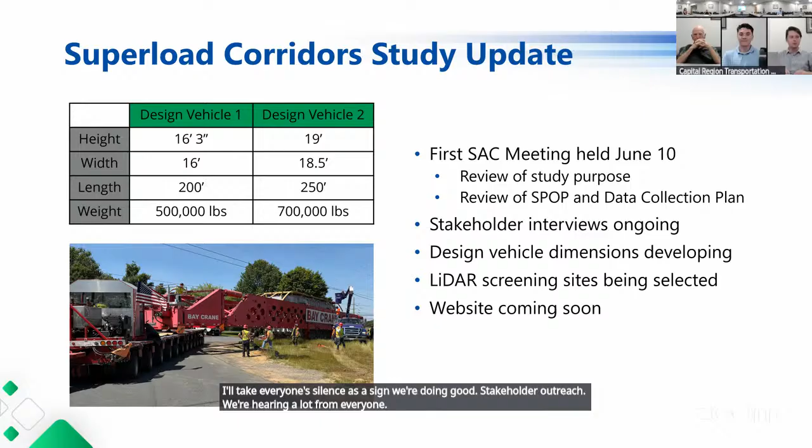So does anyone have any questions about the current status of the superloads, or anything they'd like to share that we haven't heard yet? I'll take everyone's silence as a sign we're doing good stakeholder outreach. We're hearing a lot from everyone, and really appreciate everyone's participation in this study.

So next I'll turn it over to Adam for an update on the Capital District Clean Communities Program.

Thanks, Ethan. So I'll keep this pretty brief. On June 25th of this year, we had our first stakeholder meeting, and it had just around 15 attendees. That was a pretty great start given that it was the first official meeting we had since funding returned in April of this year.

At that meeting, we had Jacob Beeman from National Grid speak about their fleet electrification programs and initiatives that they're able to assist municipalities and stakeholders with. It's mostly on the grid side, not necessarily the vehicle side, but they can do a lot of assistance and problem solving that could be useful when you're going about those projects. Definitely worth looking into if you're pursuing that type of transition.

Also, a resource I wanted to share with this group specifically is that the Advanced Vehicle Technology Group has an electric vehicles essentials online training, in case there are any fleets looking to scale up their workforce for hands-on technician-style training on how to handle, maintain, and work on EVs. It's a great resource if you're looking to do training for those folks. If you're interested, email me—there's my email. There's a discount code involved that we can work with through Clean Cities.

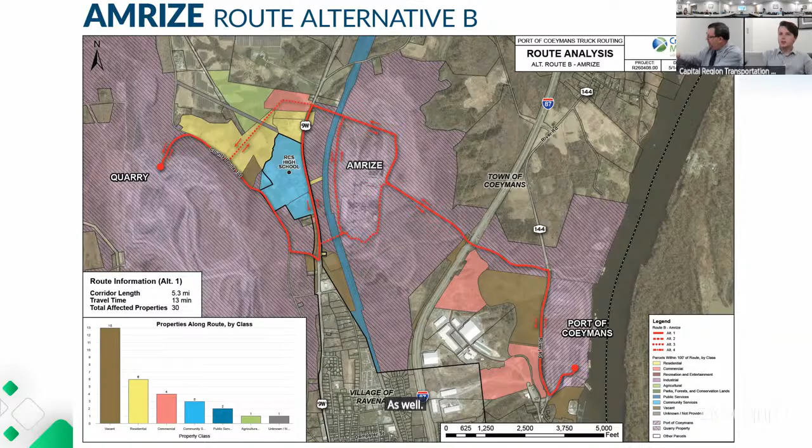So the last thing we have is just our typical updates on our regional planning studies. No big changes here from our May meeting. We have our Aiken Ave study and our Town of Stillwater study, which are both in the process of getting started. Both are out of the initial scoping phases, and those should be developing soon.

We also have our larger studies, our Albany County study looking at trails and sidewalks in different spots in the county, as well as a couple of other smaller tech assists getting started, and our larger initiatives that are still ongoing, including that superload plan we talked about. We've also just selected a consultant for our Capital Region Resilience Plan.

I'm sure we all felt the impacts of the rain the last couple weeks. I heard this was the most rain the region has gotten since one of the last hurricanes came through the area. I experienced a number of road closures as I was traveling throughout the region, and many warnings saying do not travel unless you're escaping floods.

So hopefully this study will identify improvements we can make throughout the region, both at specific sites and system-wide, to help mitigate the impact of these increasingly frequent extreme rain events. If anyone's interested in that, reach out to me, and I can connect you with Andrew Tracy, who's our staff member leading that resilience plan.

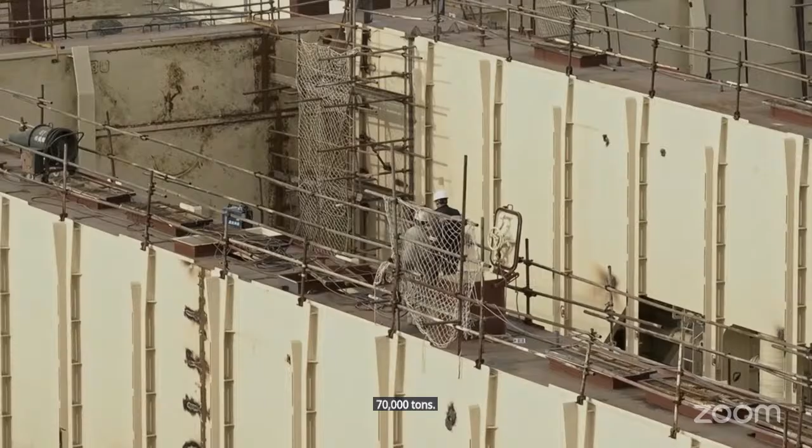70,000 tons. Intense vigilance and rigorous organization are essential at all levels for these behemoths to be completed in time. In one of the shipyard's many warehouses, workers are building a section of the ship called a block. A special system is used to coordinate the production of the 9 ships, similar to a giant Lego.

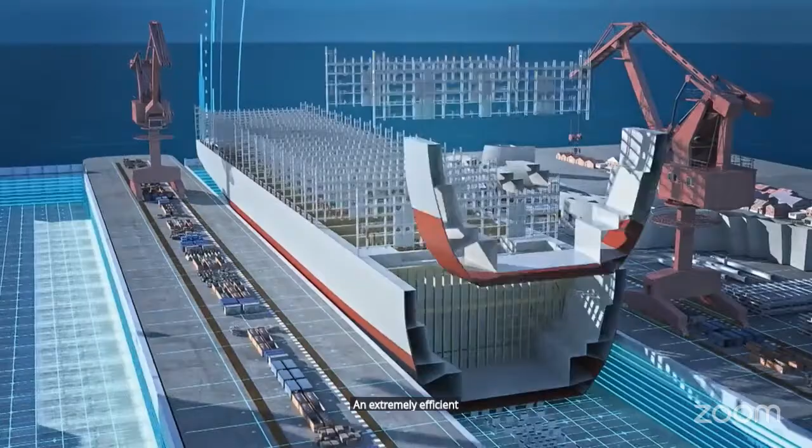The ships are assembled in the dry docks in huge basins. One by one, the blocks are delivered and welded together, an extremely efficient construction method. Each block has a precise function and specific place in the overall construction of the ship. To produce these giant vessels without wasting time, the construction plan was broken down into thousands of independent blocks, like an assembly line. And to save even more time, everything's already installed: piping, fittings, ready to be connected.

These huge parts are brought to the center of the shipyard near the dry docks, where they're mounted on the part of the ship already built. Like a skeleton, every single part of the ship becomes visible.

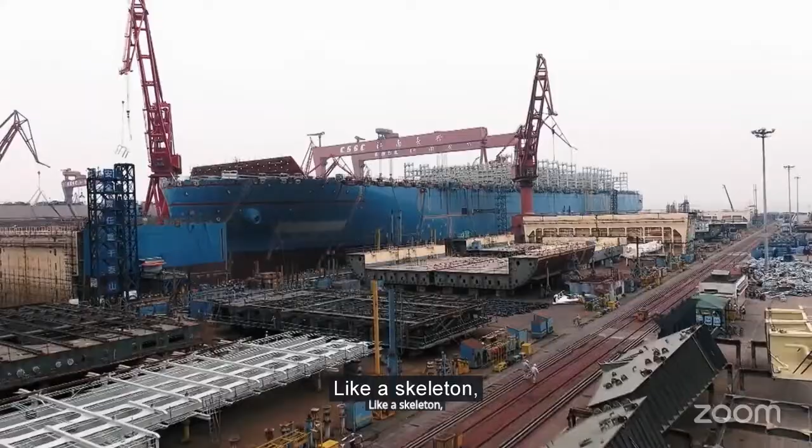These floating giants have a very thin but extremely strong outer wall. A complex puzzle with countless pieces.

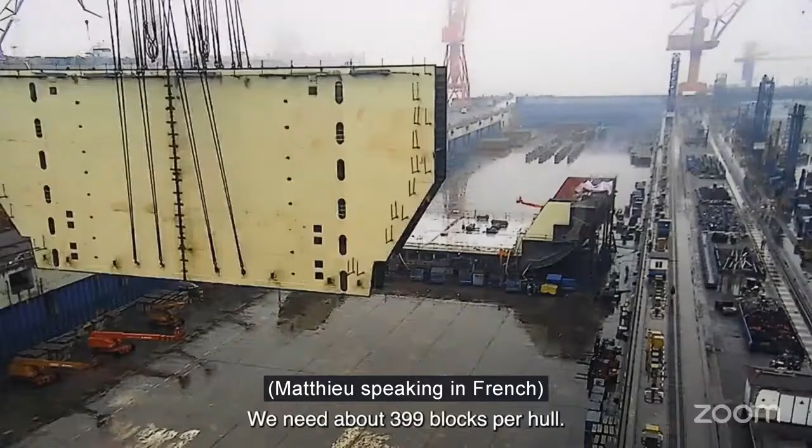All parts need to be assembled with surgical precision. Part of the tail, consisting of 5 blocks, slowly moves towards the basin like a spaceship from Star Wars.

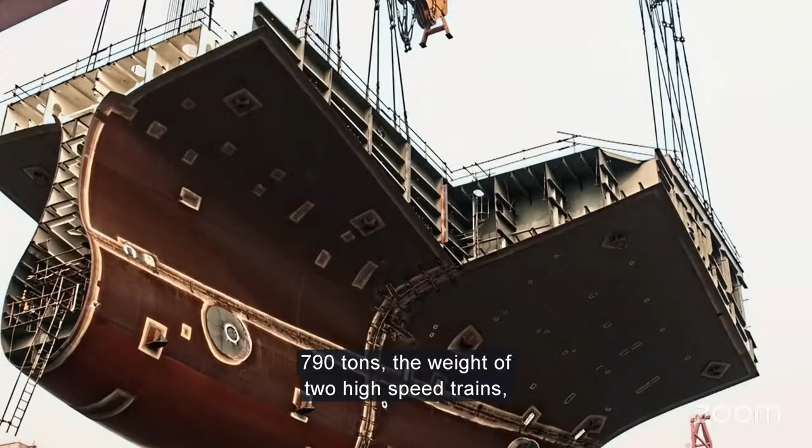790 tons, the weight of 2 high-speed trains, floats in the air. No problem for the massive port cranes, which can lift up to 600 tons, with 2 cranes working together. The assembly of the massive parts has to be perfect.

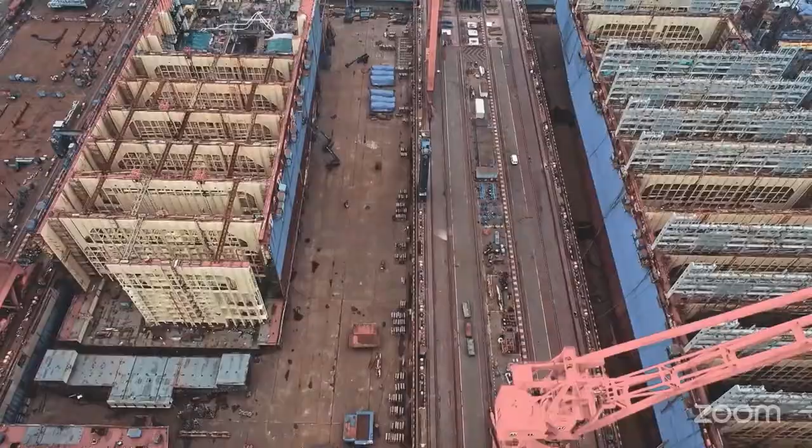But how's it possible to build the ship without blocking access to the bottom of the ship? How can individual parts be protected from getting damaged on the ground?

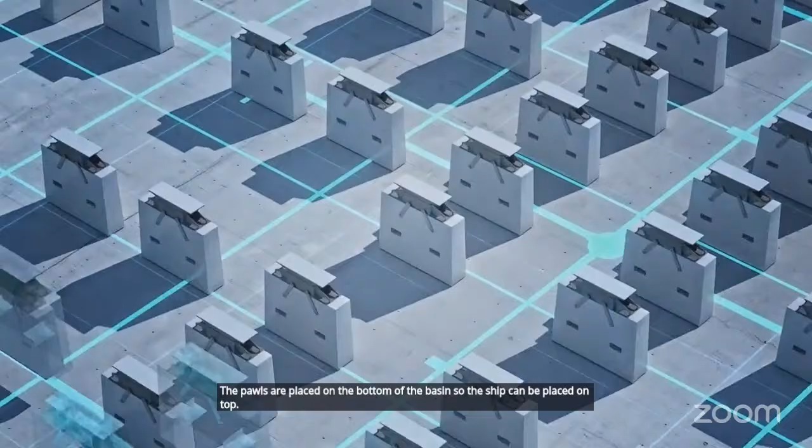The trick? Small, incredibly stable support beams, known in technical jargon as pawls. The pawls are placed on the bottom of the basin so the ship can be placed on top. A pawl consists of a concrete block with a metal structure attached on top. Each one can carry 200 tons without damaging the hull. Together, the pawls support the weight of the completed ship, nearly 70,000 tons.

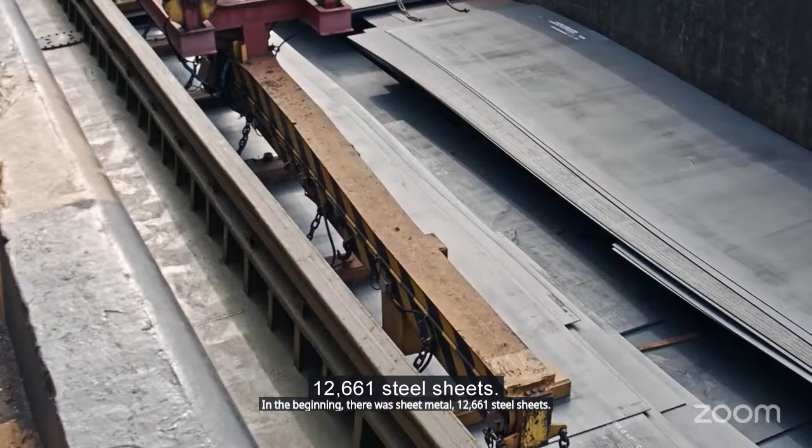Everything's ready for the next mega ship to be assembled. In the beginning, there was sheet metal: 12,661 steel sheets. They're the raw material for the structure of container ships.

Just like cells in the human body, they're delivered by sea, by the hundreds. The structure of the ship is made of these sheets, mainly steel, a material that can be used over and over again. The beauty of a ship is that it's 99.9% recyclable. When the ship's dismantled in 30 or 40 years, almost all the parts can be recycled.

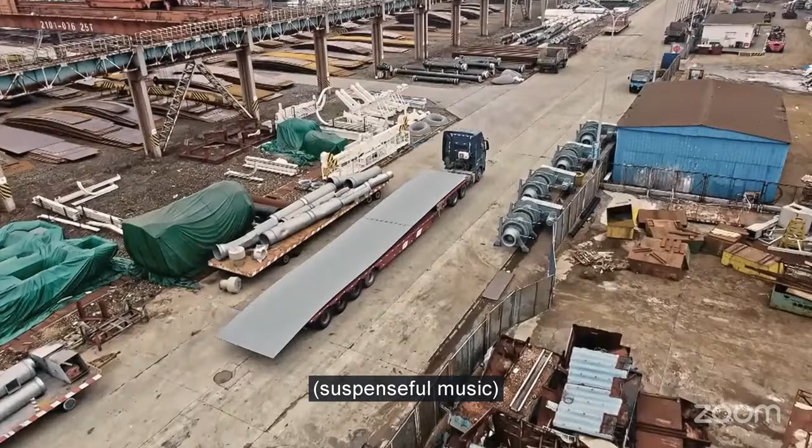This sheet metal field is located near the warehouse. Thousands of plates are waiting to be cut to size.

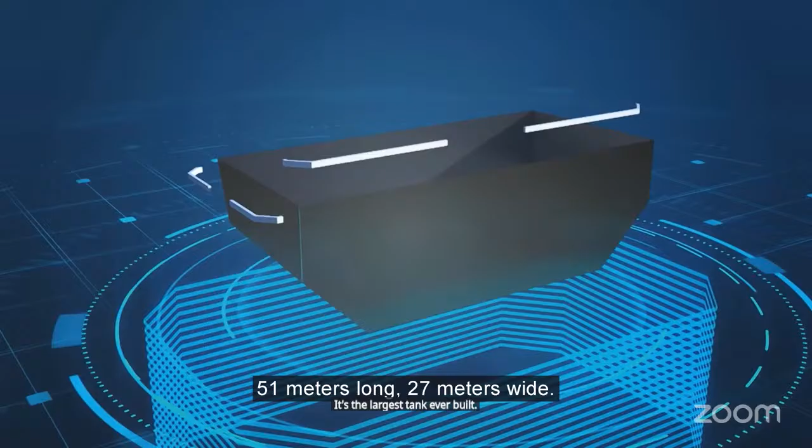It's the largest tank ever built: 51 meters long, 27 meters wide, measuring 18,000 cubic meters, as much as 6 Olympic swimming pools. The liquid gas offers a huge advantage and solves a familiar problem.

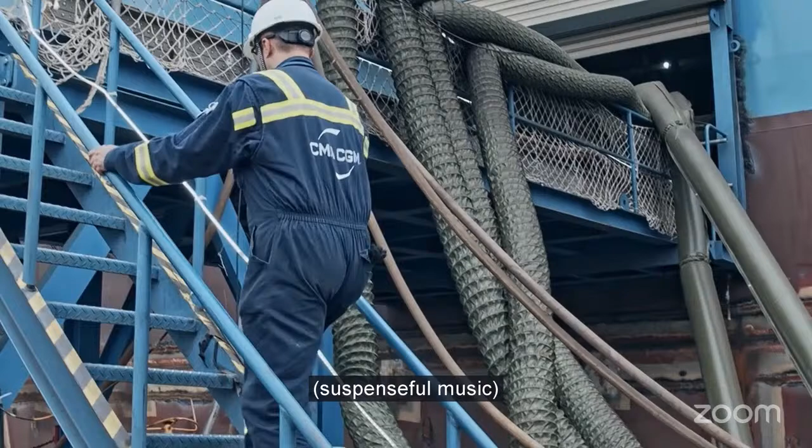After a 6-month phase of block assembly, a new stage begins: installing the tank. To do this, a block must be completely insulated, a lengthy and critical stage that requires meticulous precision, and which can last up to 9 months.

How can the natural gas be perfectly insulated at minus 161 degrees, in a tank exposed to wind and weather on the high seas?

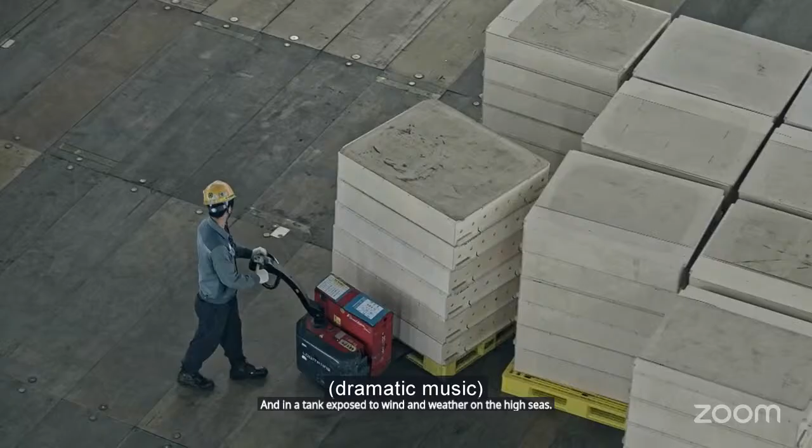To accomplish this, 27 centimeter thick sheets of polyurethane are used. They protect the outer walls from the extreme cold.

The panels are glued to the walls of the tank and then fastened.

That's why the tank is divided into several levels, so workers can cover the entire surface of the huge hull, a work phase that takes 7 weeks.

The first layer of insulation is ready, but is it absolutely airtight too? Even though it's always a race against time on the construction site, the crews still have to make sure everything's working properly and check every single seam. The work is divided into inspection zones.

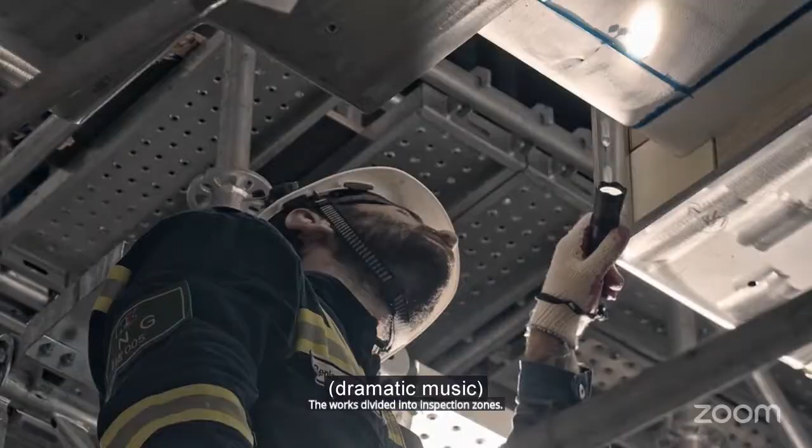A leak was found here. In such cases, technicians use an efficient method, which is surprisingly simple.

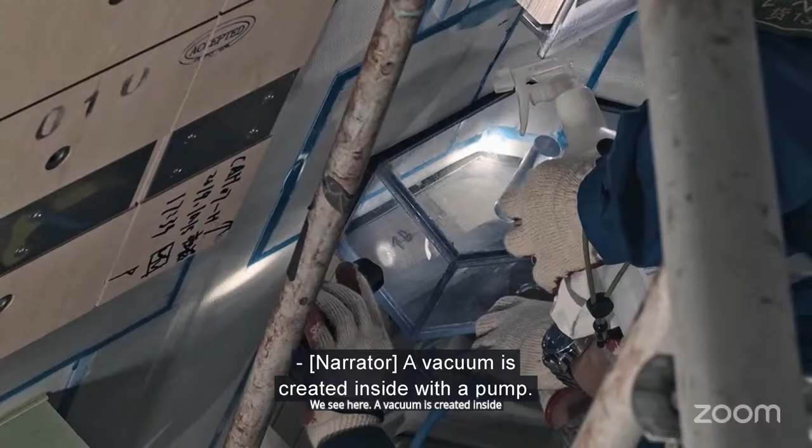Water. The affected section is covered with soapy water. Then this plexiglass box is used. A vacuum is created inside with a pump. If air bubbles escape through the inner wall, it proves the seam isn't completely airtight.

Then you need to glue that spot again, in a timely manner. It's important not to waste a minute. The procedure needs to be repeated on the lower levels. The countdown continues; after 16 weeks, the first stage of installing the tank is complete.

A second, much longer stage is about to begin. The tank is the energy reservoir of the ship. From here, the liquefied natural gas is routed to the engine.

The problem is both the gas volume and the distance to be covered are extensive. Because of balancing, the engine is located at the other end of the ship.

So a suction mechanism needs to be built into the tank. Here it comes, its weight 25 tons. Its task, to pump the gas to the engine. Its name, the gas mast.

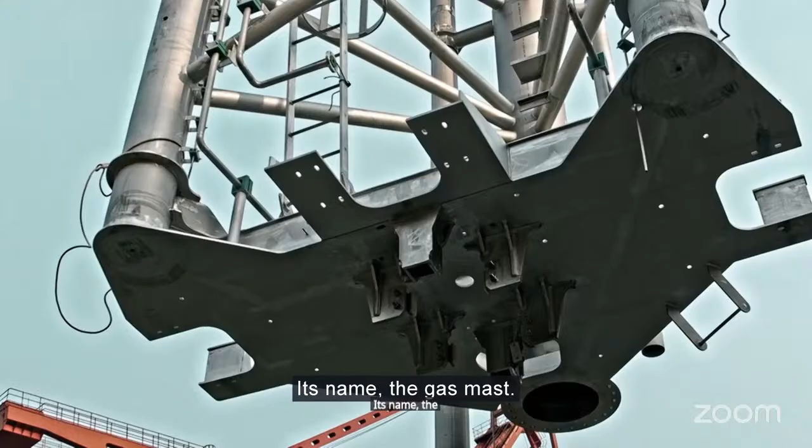The engineers had to design a mast that is virtually indestructible because it needs to withstand extreme conditions in the tank.

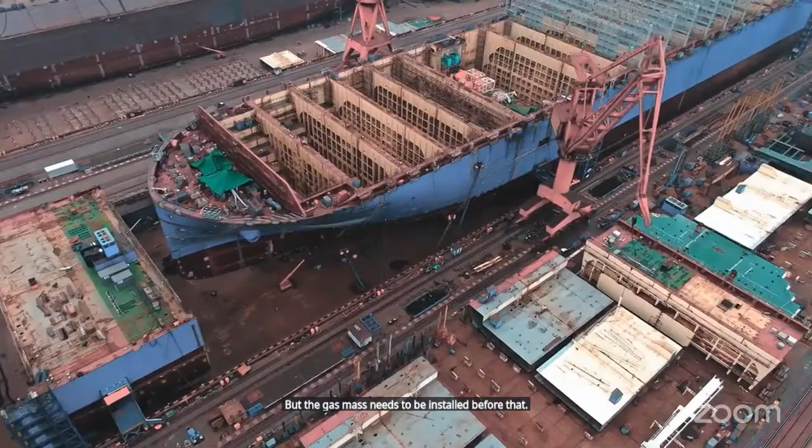It's lowered into the tank from the top. The mast is 6 meters wide, and the opening through which it's lowered is barely larger.

The mast is lowered centimeter by centimeter. Around 15 workers are involved in this delicate operation.

The metal monster floats in the air.

Finally, the mast is now securely attached. There are 4 pumps at the lower end, just a few centimeters above the bottom of the tank. They pump every drop of the liquid gas.

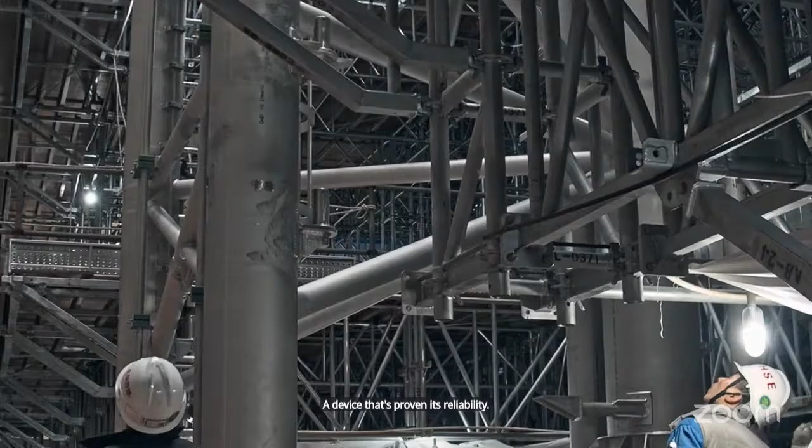Now the tank's last layer of insulation is added, the so-called primary membrane, a 1.2 millimeter thick sheet metal. It's what gives the tanks their waffle-like surface structure. This membrane is ultra-thin and at the same time incredibly efficient.

The intense cold of the liquefied gas causes the steel to warp, so it's crucial that the structure itself is flexible. The embossed membrane with its wavy edges offers the perfect solution.

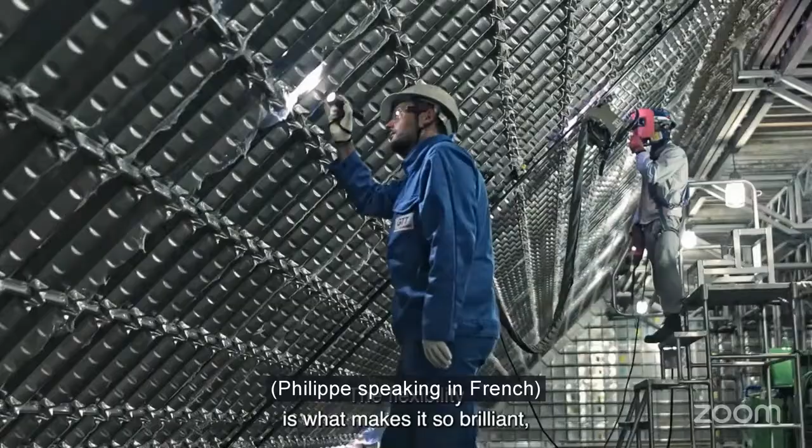Weld seams totaling over 6 kilometers run through the tank. They're extremely resistant. The same technology is also used in space travel. After 8 months of work, the tank is finally ready.

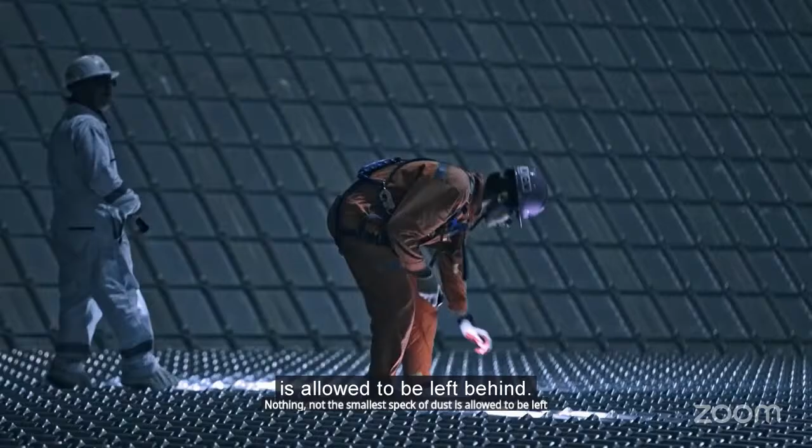A final inspection takes place before it's finally closed. Nothing, not the smallest speck of dust, is allowed to be left behind. The ship should be ready in 4 months.

Today, 3 months after work began, is a special day for the engineers. They've come to the mainland because one of the core pieces of the project is being completed in these halls today: one of the most spectacular individual parts of the ship, the engine.

With its 24 meters length, 18 meters height, and a weight of 2,000 tons, it generates an output of 85,000 horsepower.

A genuine independent construction. Before the engine's mounted in the ship, it's tested to the extreme. The engine's pushed to its limits, to 110% of its capacity. This test is absolutely necessary to check the stability of the motor in extreme situations.

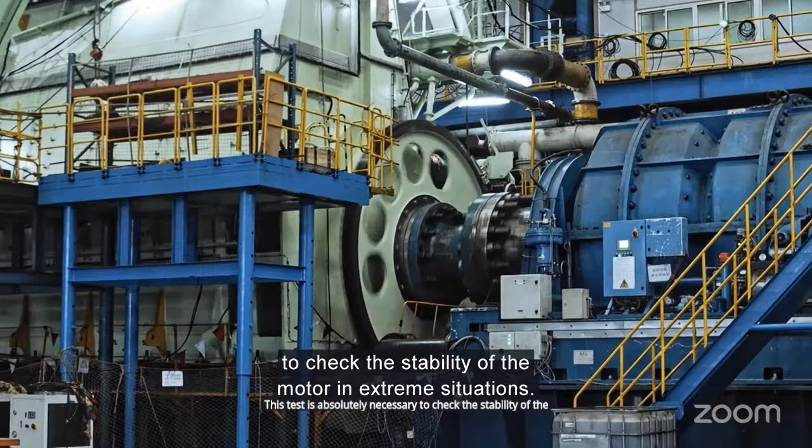Repairing this massive component on the open sea would be extremely complicated, and it was actually developed to simplify the work of mechanics. If there are any serious problems, mechanics can enter here to the center of the engine.

But the tests went well. The engine passes with flying colors. It'll be installed in one of the 9 container ships in a few days.

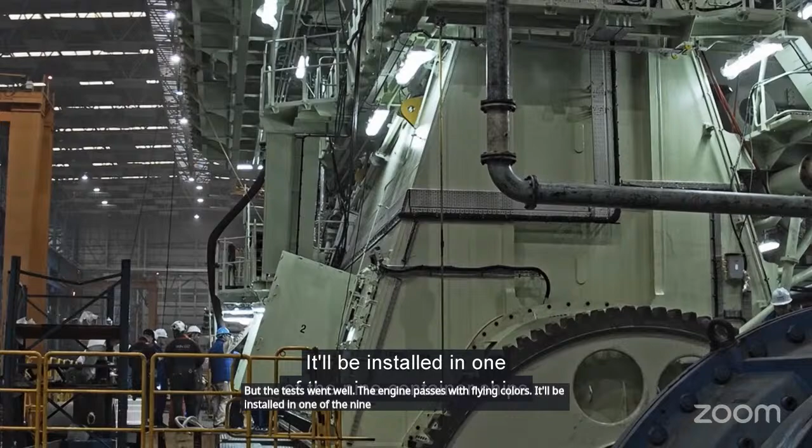Talk about high stress, being the person who has to go inside the engine to repair it if it's malfunctioning out in the ocean. Is it the engine manufacturer? That's a good question. It didn't say, but I don't know. You'd almost expect it to be a similar company as the one making the ship. What's the price of building one?

Hopefully it'll say at the end, but I cannot imagine. I'm sure it's extremely expensive. Is the company on the stock market? That's a good question too. They're French, so what's the French stock market?

Tom Phelan shared that the port capacity for these ships is dictated by several factors, including channel depth, overhead draft limits like the bridges over the canal, and the handling capacity at the pier, such as having cranes that can take them off.

Tom, do you think some of those larger US ports would be able to handle these ships? Yes, I think they would. Savannah is one in particular that comes to mind for the East Coast. What you find is that very often it's market driven, sometimes it's just a matter of which ports are handling sufficient volume from one carrier or vessel operator to justify bringing them here. Very often if a carrier is making a single port call on the West Coast, running right to Los Angeles, you could justify using a ship that large. On the East Coast, you run into issues because the ship will make multiple port calls, generally one north of Cape Hatteras, North Carolina, and another in the south, so you need a ship that meets the constraints of both ports. I haven't heard of any regular service by these 18,000-plus TEU ships here in the Port of New York and New Jersey. Gotcha, very interesting. Thanks for that insight, Tom.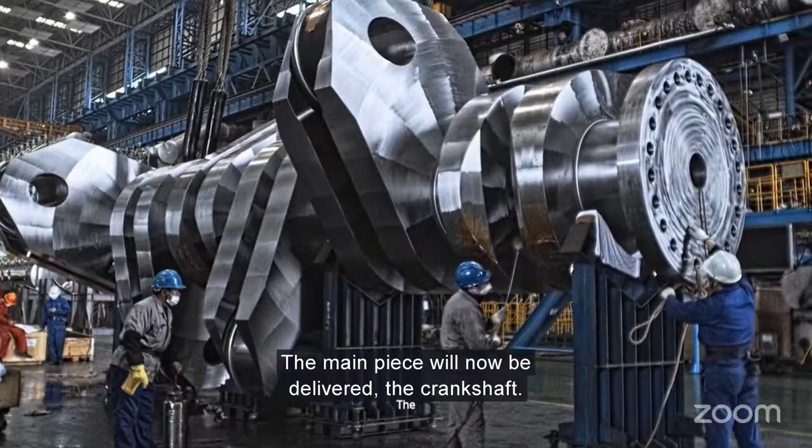A critical step is about to be taken: the main piece, the crankshaft, will now be delivered. The crankshaft is the axle that connects the engine to the propeller and powers it. Its weight is 220 tons, and it moves with the help of 12 pressure pistons.

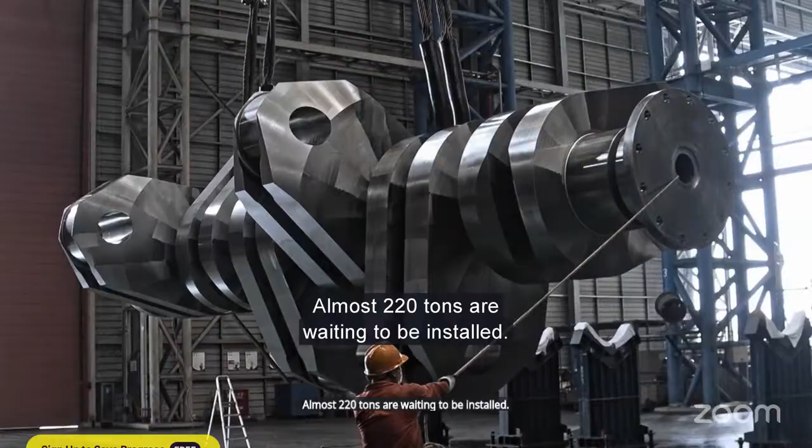First the part is thoroughly oiled. The pressure pistons are connected later once the crankshaft is in place. This is genuine engineering—almost 220 tons waiting to be installed, done with the help of extraordinary cranes.

So far this is only half of the crankshaft. The 12 pressure pistons each have a diameter of 1 meter, that's 10 times more than a car. When running, they move 3.2 meters up and down.

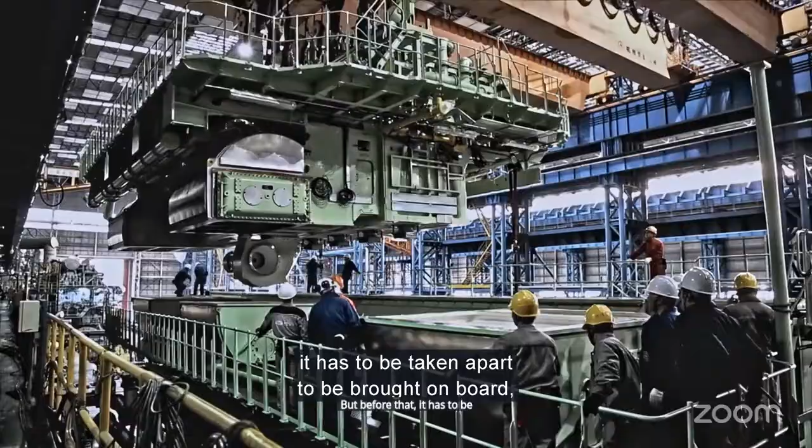The engine is now mounted onto one of the ships, but before that it has to be taken apart to be brought on board, and it's not that simple. No vehicle in the world could move this 2,000-ton massive part.

That's why it's separated into 6 parts, transported individually by ship to the shipyard. This is the main part, and it includes the crankshaft.

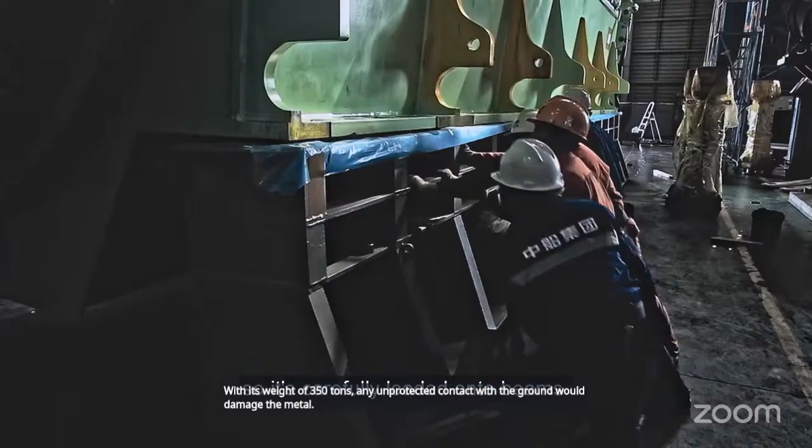The crankshaft is carefully lowered. With its weight of 350 tons, any unprotected contact with the ground would damage the metal, so it's carefully loaded onto beams. Even though the beams are temporary, they're still attached carefully.

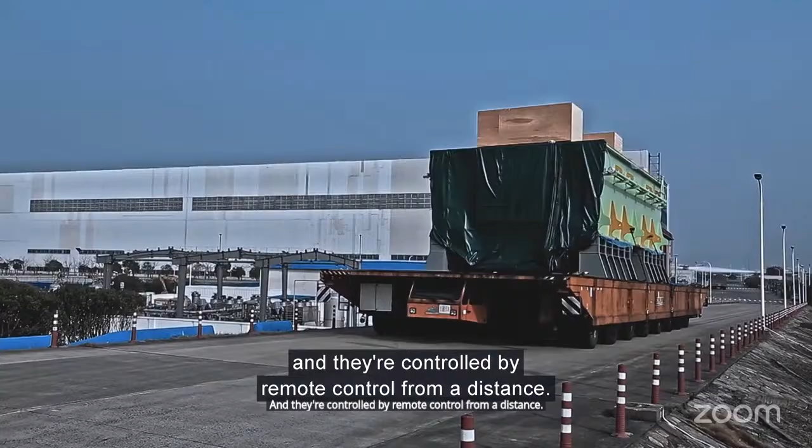To endure such great weight, these transporters have up to 140 wheels. They weigh more than 10 semi-trucks and are controlled by remote control from a distance. Because safety is a top priority, the transporter only travels approximately 5 kilometers per hour.

The ship is already waiting when the transporter reaches the barge. The engine is loaded as slowly as possible. Everything's ready to transport it to the shipyard.

To get the container ships moving, which can weigh up to 300,000 tons when fully loaded, the propulsion system has a propeller with a very distinctive form. Their streamlined shape delivers increased performance.

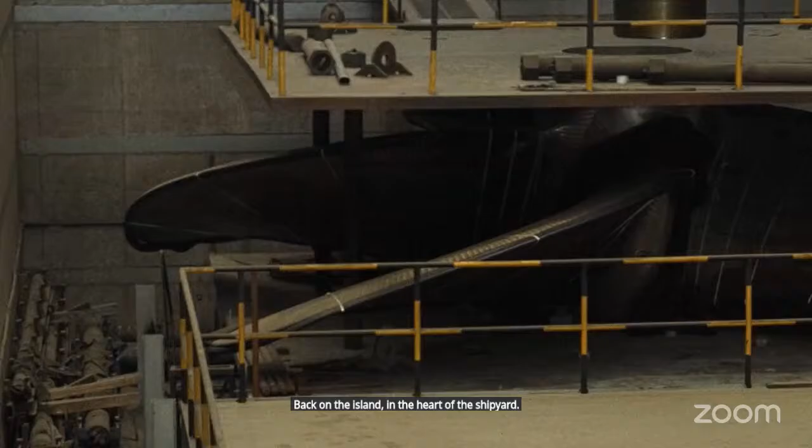Back on the island, in the heart of the shipyard, this part was designed in Germany and made in China.

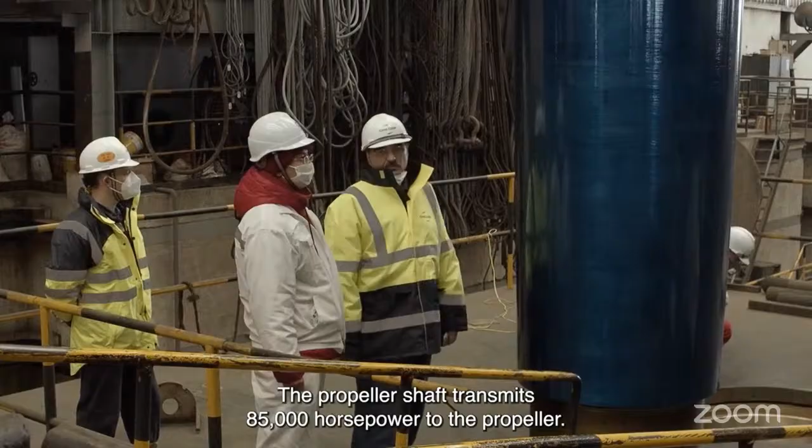In other words, the 2 parts have to be 100% aligned. There can't be any discrepancy whatsoever. At full speed, the slightest inaccuracy would have irreparable consequences. A dye is used to perform the test: methylene blue.

Now the 2 parts come together. The blue color shows exactly where the contact points are.

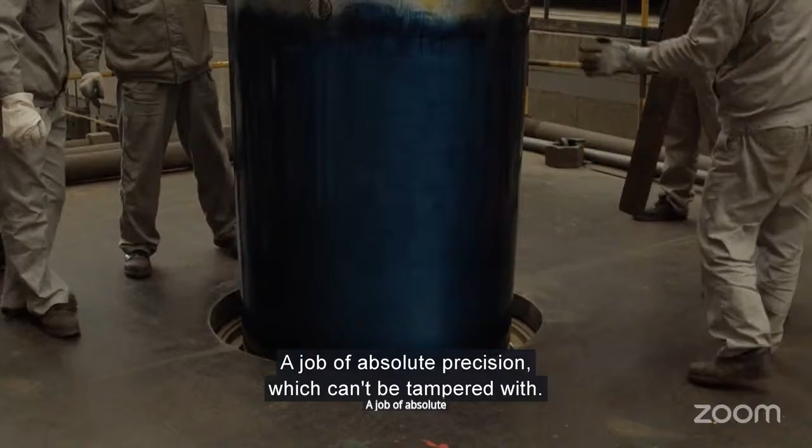A job of absolute precision, which can't be tampered with. 52.5... 5, 2... okay, now 52, it's okay. The propeller shaft is raised one piece at a time. The propeller and propeller shaft fit perfectly into each other.

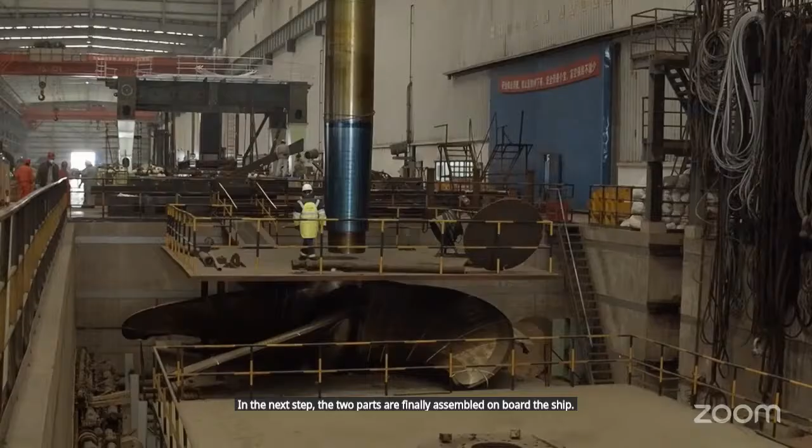Because the construction of each ship is progressing at different stages, the quality and cutting of the sheets must be constantly monitored. The metal is cut with a plasma beam, generating heat of approximately 18,000 degrees Celsius, cutting the steel like butter. In total, more than 880 kilometers of metal sheets are required for one ship. That's the distance between Paris and Berlin.

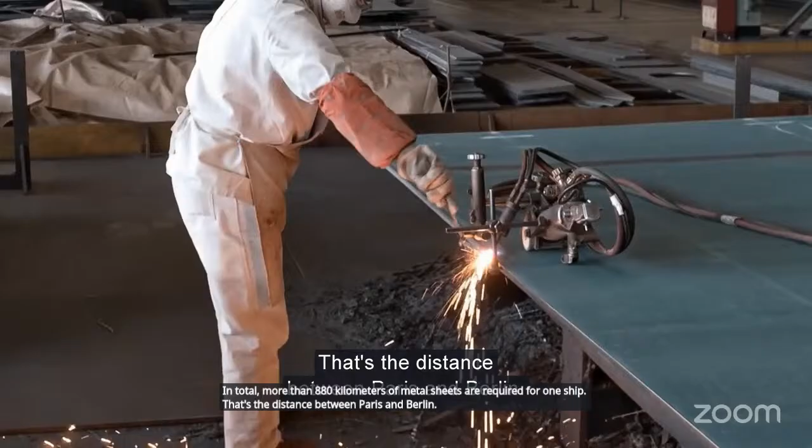There aren't any high-tech robots here and very few automated processes. Everything's done with industrial machines and human hands. Every worker has a place. This is where the first parts of a new ship are taking shape. These plates can now be assembled together to form new blocks.

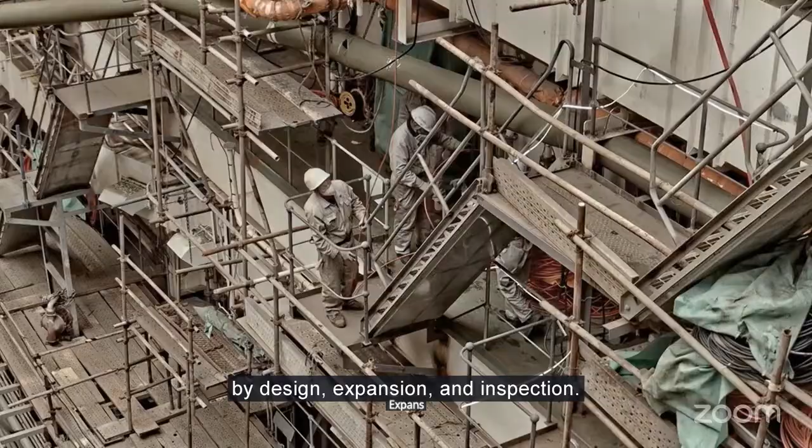Work at the shipyard is carried out in several stages: by design, expansion, and inspection. And now I want to see this, if it's good.

It's now time to assemble the last block. It's already waiting a few meters from the basin. André supervises the operation.

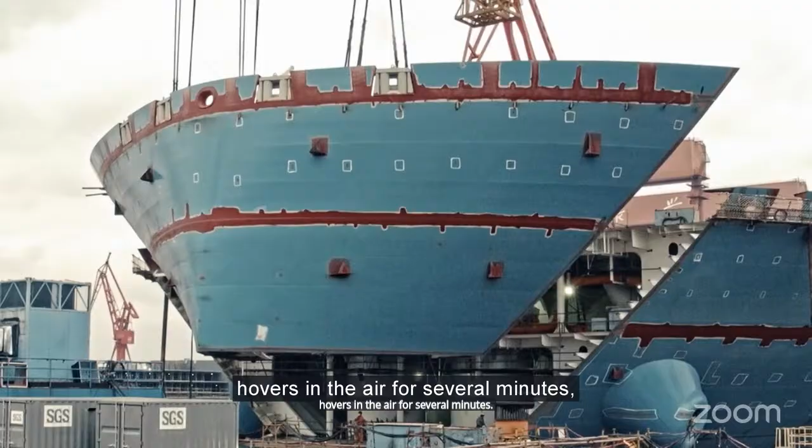The block is slowly lifted up, hovers in the air for several minutes, then fits perfectly in its place in the bow of the ship. Now it just needs to be welded in place, and the ship will be completely finished.

These ships are gigantic metal construction sets, but they're also extra-large patchwork rugs. The connecting seams stretch across the entire hull like scars.

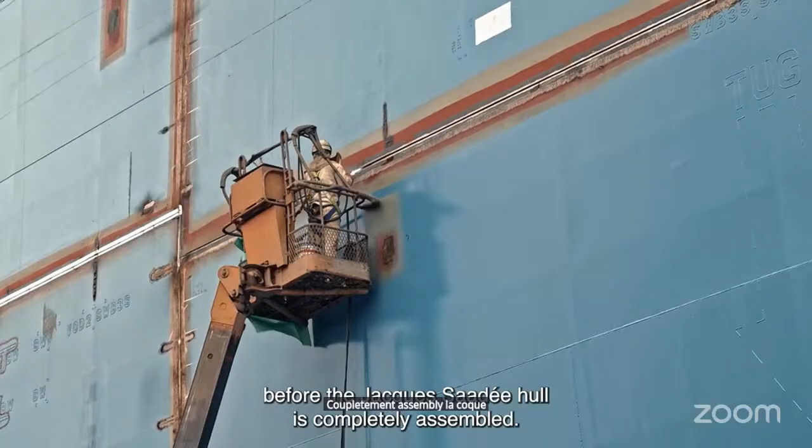1,248 kilometers. That's the distance between Marseille and Manchester.

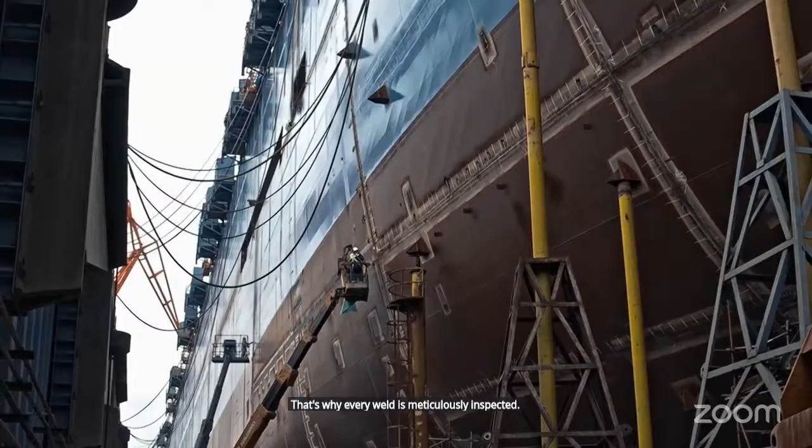Sparks are flying all over the shipyard. Thousands of sheets are welded at the same time. Once the ship's at sea, there can't be any structural weak points. Like a weak link in a chain, the slightest mistake at sea can mean disaster. That's why every weld is meticulously inspected and redone if necessary.

The simultaneous construction of the nine container ships continues. Now it's time to install the propeller. The installation on the lower part of the hull is a delicate matter. The propeller was cast in one piece in a specially made mold. With its 92 tons and 10 meters in diameter, it can't be transported by road, so it's transported to the shipyard by ship. The last meters of the journey are conducted by massive cranes, which carefully load the propeller into the basin.

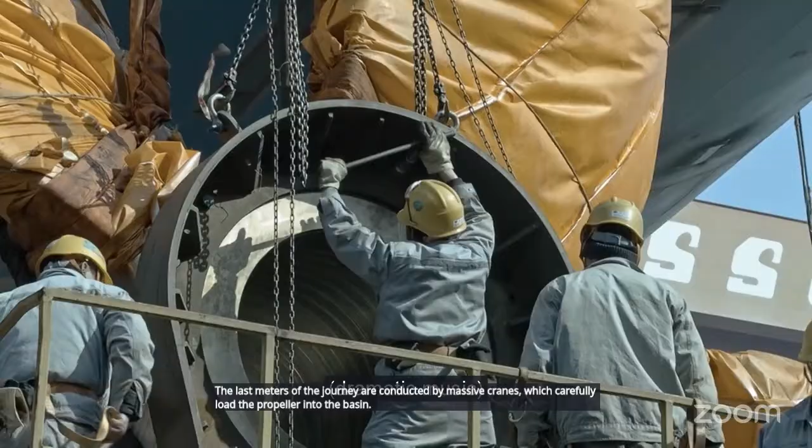The first thing that has to be done is to prepare the propeller shaft. Meticulous wrapping protects them from contamination. Nothing should interfere with the installation of the propeller. Now the propeller is slowly moved forward, then, meter by meter, lifted and aligned.

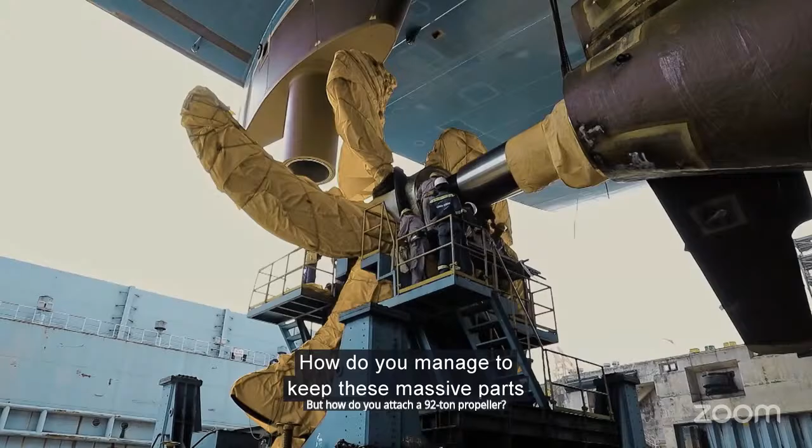But how do you attach a 92-ton propeller? How do you manage to keep these massive parts completely still? The answer: oil pressure. The men don't help; the propeller is simply moved into place by oil pressure, where it's finally attached. Now the oil is injected, filled through this huge nut, and the propeller is precisely attached to its axis.

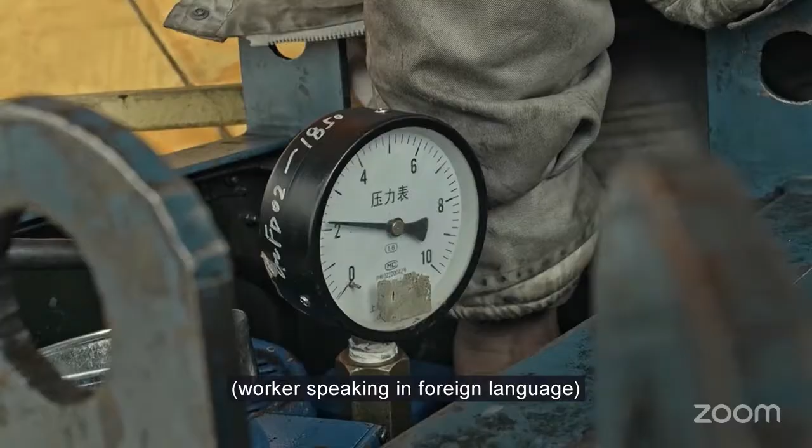The oil pressure increases as the entire team watches carefully. It's under constant observation. Adjustments take place directly on the hull, the old-fashioned way. Once the propeller's attached, the oil is collected to be reused later. Now the screw can be uncovered.

So just a quick thought — I know you were asking about what engine manufacturer that might be for this one. I'm not sure on the specifics, but I know there's a group called HD Hyundai, which used to be called Hyundai Heavy Industries. They're the largest shipping manufacturer in the world, but they happen to make engines as well. I was also checking if this GTT group did, but it looks like GTT outsources to a group like Hyundai Heavy Industries for their engine units, and then builds the rest of the ship, or that the fuel tank is what they focus on. It was interesting them saying that the engine is 350 tons — that's about 700,000 pounds.

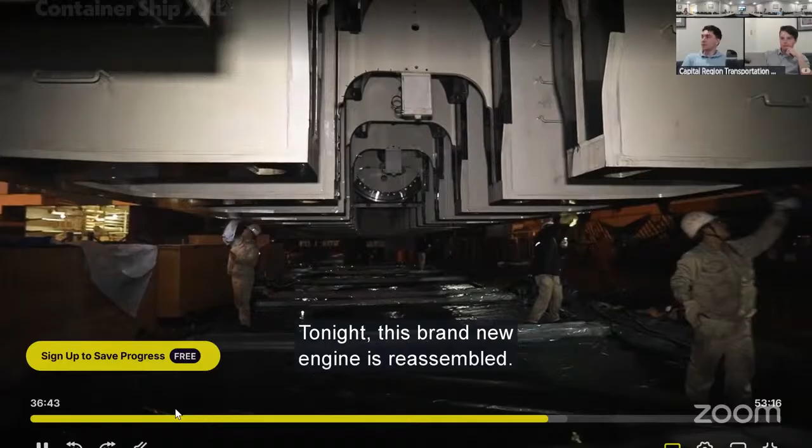This time, however, directly on board the ship. This is the lid, the upper part, the last missing part of the engine. The ship has to be able to transport hundreds of tons of goods without anything slipping.

The massive piece hovers over the ship at a height of more than 20 meters before it's lowered into the heart. Everything's already prepared. The crankshaft and pressure pistons are just waiting for the last part of the engine to be inserted.

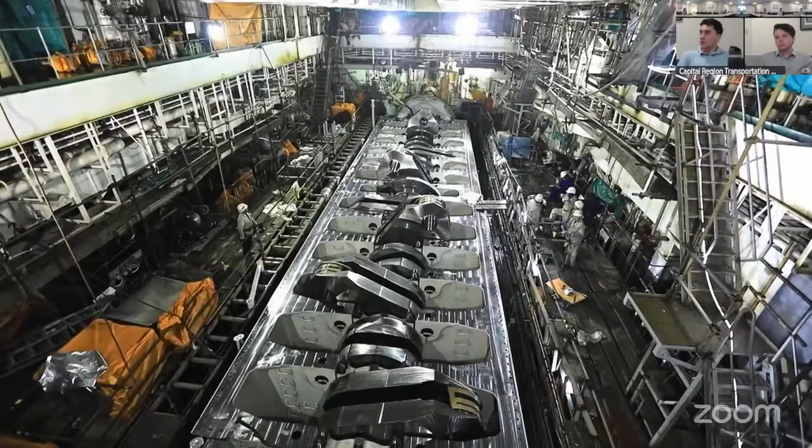Now the parts just need to be attached to each other.

The ocean's a particularly hostile environment where the hull is put to the test. The salt and friction erode the paint. It's possible that entire layers of paint peel off. This clearly slows down the ship. The ship needs to put more pressure on the engine to maintain its cruising speed.

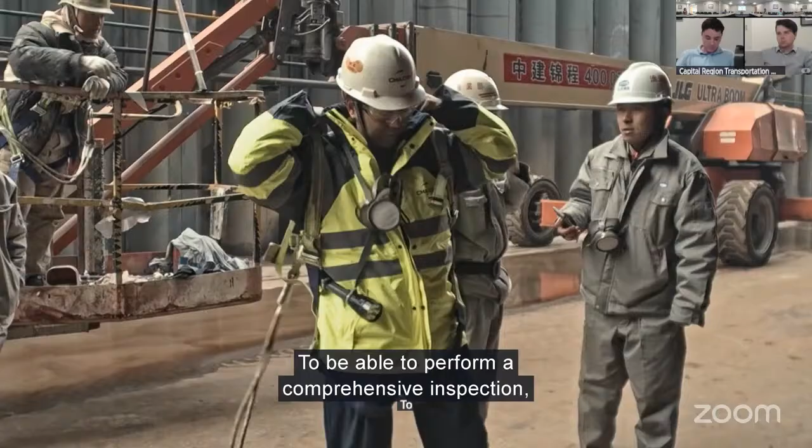To be able to perform a comprehensive inspection, he climbs onto the freight elevator. But an inspection like this can be dangerous. Whoa, whoa, whoa, go down, down. At this altitude, the wind sways the gondola quite a bit.

If the ship's side isn't perfectly smooth, the spot is leveled with a grinding machine and repainted. So this is the remaining. Once they cut, they will do the repair one more time. An enormous job that has to be carried out on each of the ships.

The total area to be covered is around 950,000 square meters, the length of 135 soccer fields. It's worth noting the total weight of the paint can be up to 1% of the weight of the ship.

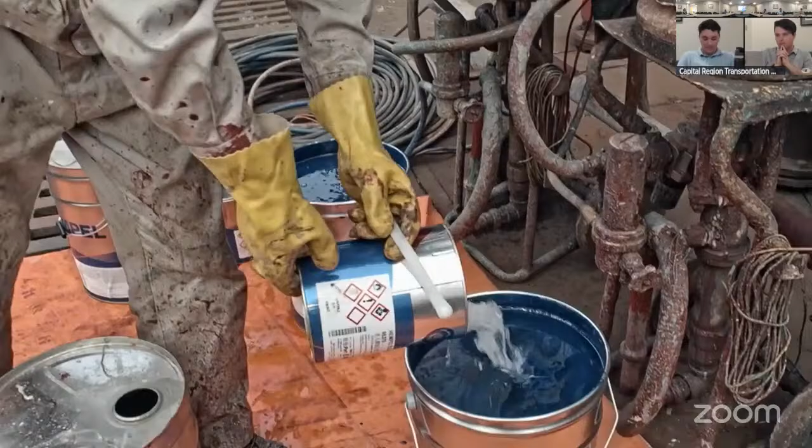The last layer of paint can now be applied. This will take 1 to 2 days. Nearly 1 million liters of paint are used for each ship. About 2/3 of that protects the part of the hull that's underwater.

This extraordinary container ship will carry a significant amount of goods, the equivalent of nearly 1 billion cell phones. Whether on deck or further down in the cargo bays, everything's transported in standardized containers. 12 containers can be stacked on top of each other in the cargo bay. When one's full, it's closed with a so-called hatch cover.

Another 12 containers can be stacked on top from the outside. Absolutely everything is transported in these containers.

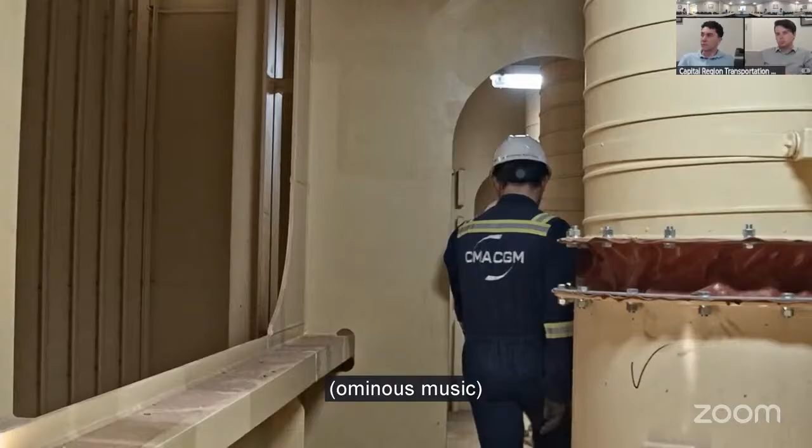Of course, the cargo also contains fresh products like fruits and vegetables. You need refrigerated containers for that, and they're connected to the ship. The warehouse has to be permanently ventilated because it produces heat.

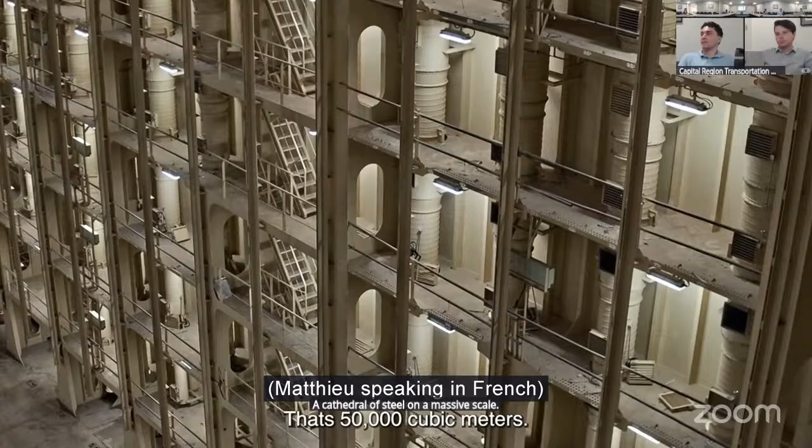But how can so many containers be loaded and unloaded? Next to these ships, a truck looks like an ant.

Huge cranes are used to load the cargo into the ships. They're lined up on one side of the ship, and their arms are long enough to reach the other side.

The containers loaded by the cranes are stacked using a rail system. So the container towers get higher, layer by layer in the storage facilities, and on the upper deck too.

The system's functionality is tested beforehand using a very particular method.

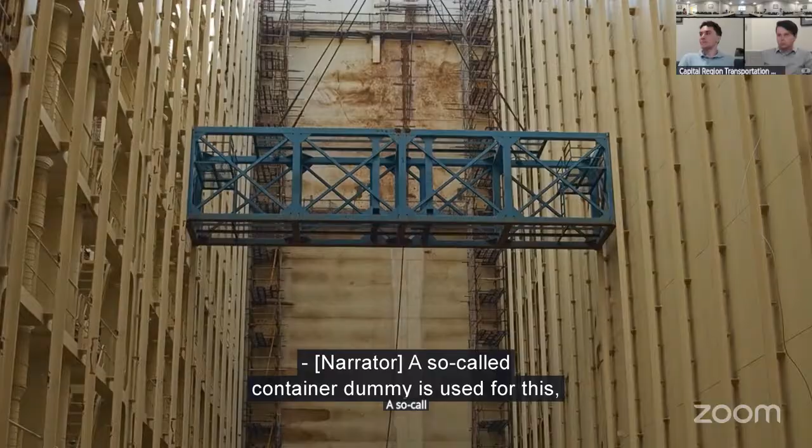A so-called container dummy is used for this, a replica that has the same dimensions as the real containers.

An engineer checks to see if there's a problem. The slightest twist or any other distortion of the rails is noted and corrected. The moorings in the ground are also inspected. The cargo shouldn't move at all while being transported.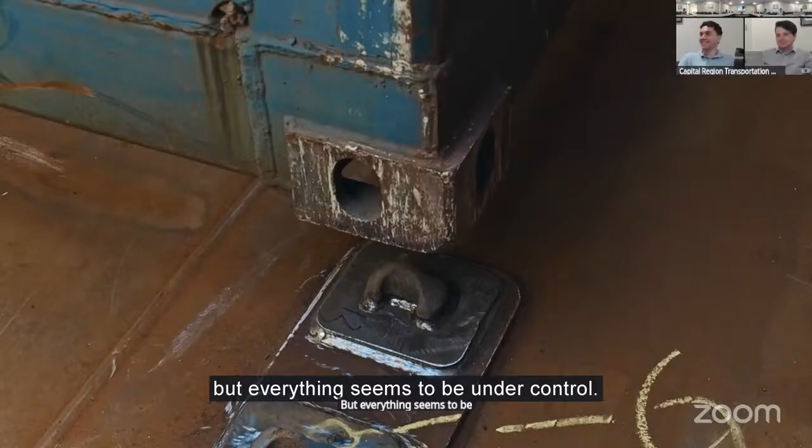But everything seems to be under control. Today, the engineer of the shipyard has done his job.

Whether in calm or stormy seas, nothing's allowed to move. The containers must be prevented from falling into the ocean. To prevent this from happening, they're attached to the ship's structure below deck and to each other. This is done with so-called twist locks.

Nothing can happen using this system, no matter how high the waves, no matter how bad the storm.

The place where everything on board comes together, the center, the brain, is the bridge. Matthew's looking at it today. This is where the ship is steered when out on the ocean.

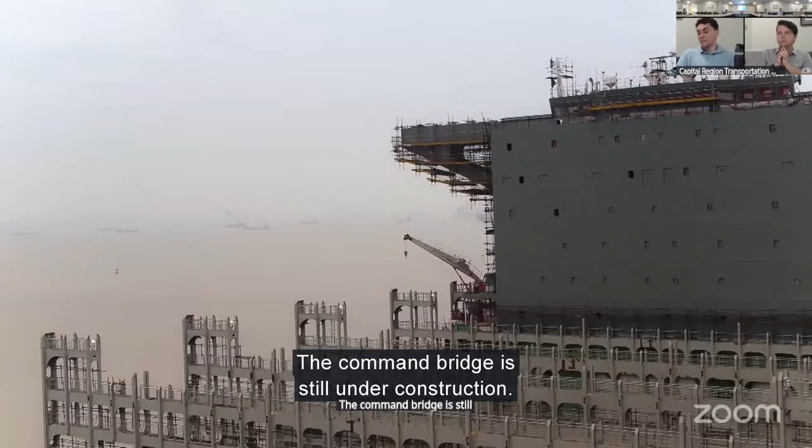The command bridge is still under construction. Workers are now laying the last cables and connecting the navigation devices.

There are more than 750 km of cables on the Jacques Saadé, and thousands of connections to check. In addition to all the high-tech gadgets, you'll also find a few very classic navigation aids.

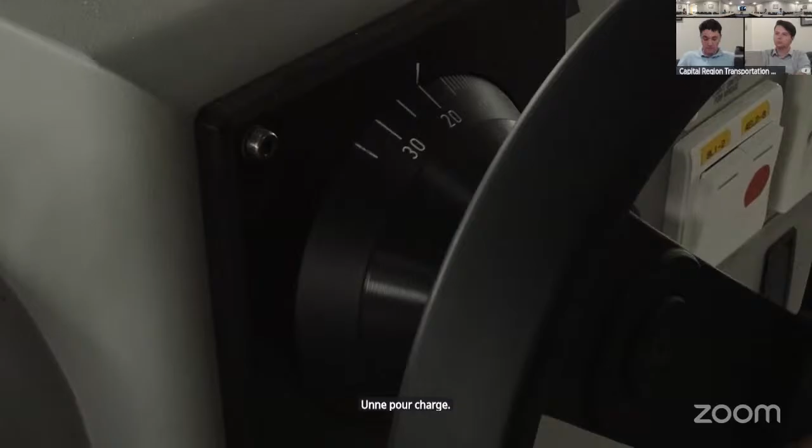But how do you dock such a massive ship? How do you manage not to damage the ship's wall, which is only 1.5 centimeters thick? Two specific outposts are dedicated for this maneuver, one on the port side and one on starboard. They know all the necessary commands.

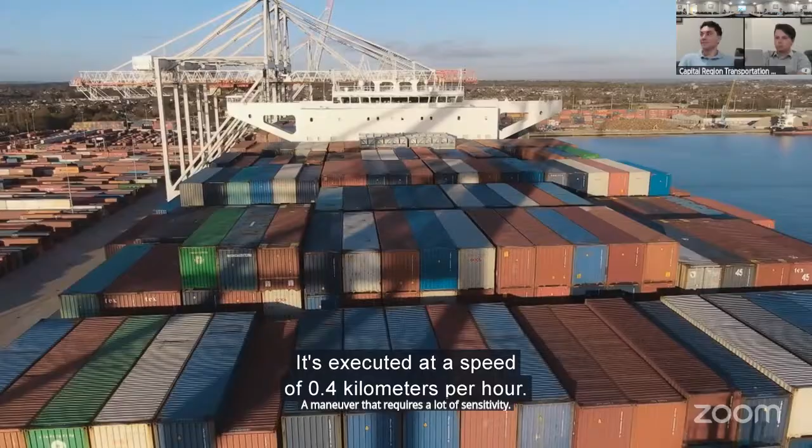A maneuver that requires a lot of sensitivity. It's executed at a speed of 0.4 kilometers per hour. The problem is, despite the low speed, you can never see the bow and stern of the 400-meter-long ship at the same time.

To solve this problem, a system called Smart Eyes is used. It contains 8 cameras distributed around the ship, providing an unimpeded view of the entire length. This allows the container ship to be moved close to the dock wall without great risk.

After a busy year and a half, the construction of the first container ship, the Jacques Saadé, is coming to an end. The other 8 ships will be completed over the next 8 months.

For the first time, the Jacques Saadé goes out to sea. There's a 15-day test phase where all the equipment is tested under real conditions. The tests are controlled from the command bridge, where all the equipment's interconnected.

But the equipment alone isn't enough. It's only an aid to navigation. A machine can never replace a human being. The experience of the team is what matters.

Le navire est l'un des navires les plus informatisés électroniques du monde. On a toutes les informations que l'on désire. Toutefois, commander un navire, c'est croiser les données et être sûr de ce qu'on lit sur les écrans.

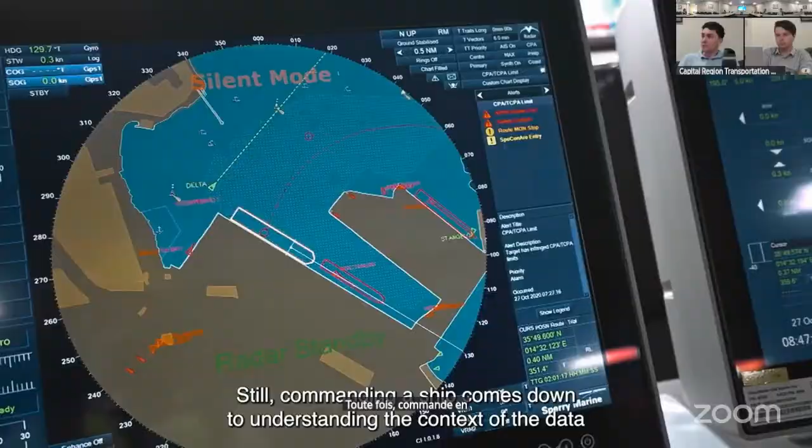Okay, thanks. Every electronic device is tested, the mechanics too. How will the brand new engine respond? Speed tests are performed. 3, 2, 1, start! During the test today, the engine performs as it should. There's another test awaiting the ship tomorrow.

When the engine's off, the ship should stop moving. Now comes one of the most symbolic pieces of equipment, the anchor, which of course is also inspected. Like the ship itself, the anchor is enormous.

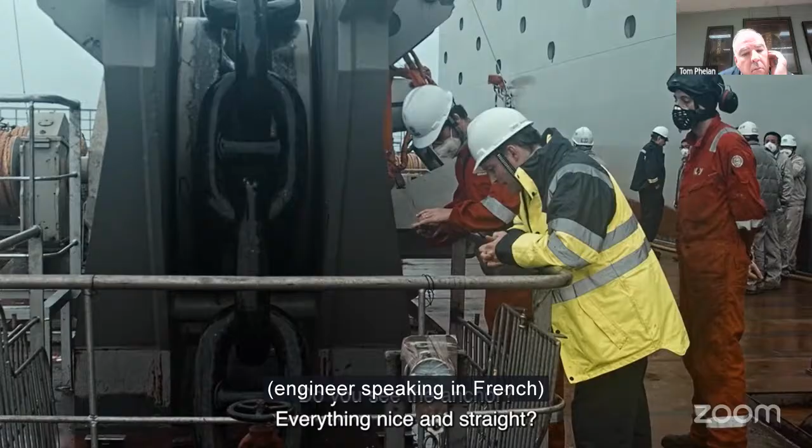This is where the anchoring is rehearsed and the performance of the anchor winch is tested. J'ai regardé l'ancre, elle est bien droite. This is the name given to the mechanism which returns the anchor to the ship. Donc nous avons mouillé l'ancre par plus de 100 mètres de fond. Et maintenant on vérifie les performances du guindeau. On vérifie que le moteur est capable de remonter le poids de la chaîne et le poids de l'ancre qui pèse plus de 27 tonnes.

And that doesn't even include the chain links. Each individual link weighs 300 kilos. The total chain weighs about 372 tons, more than the weight of 60 African elephants. After a few minutes, the anchor rises to the surface. The ship appears ready to sail the world's oceans.

With the inauguration of the first ship, the French shipyard has won the race against time. 9 gigantic revolutionary container ships were built in record time on this huge shipyard. The French company's gamble has paid off. The first completed ships will soon be traveling their routes. The others will follow.

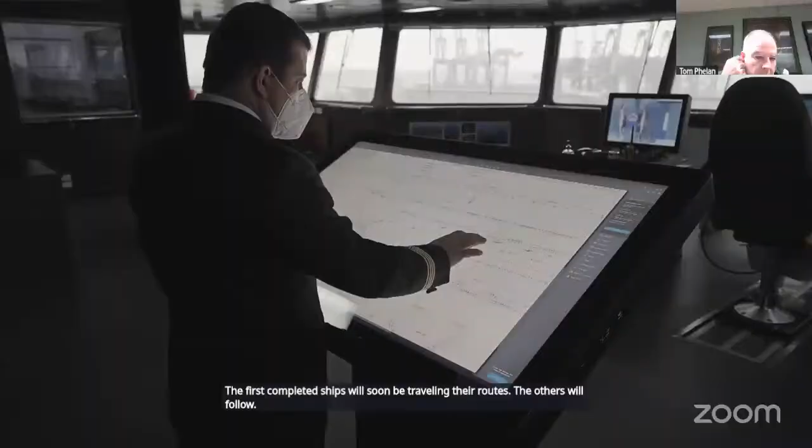The global flow of goods continues to increase. Today, 90% of freight is transported by sea. 100,000 cargo ships already navigate the seas, so improving their life cycle assessment is an important goal for our planet. Le monde maritime, d'une manière générale, est en train de vivre une révolution très importante. Le défi environnemental du transport maritime, il est immense. The liquefied natural gas improves the life cycle assessment of the ships to protect the ocean, air, and the ports.

But what will transportation look like in 20 or 30 years? Engineers are already busy developing future-proof solutions. The challenges ahead are daunting. Ultimately, the goal has to be an end to CO2 emissions. Aujourd'hui, on n'a pas la solution sur la table, technologiquement, mais on y travaille tous. C'est une quête, une opportunité fantastique. Libérons les idées, libérons les cerveaux pour trouver les solutions.

Of course, constructing container ships like these is an enormous financial, economic, and technological challenge. But that's not all. These ships are also a great human adventure. Together, these dedicated women and men have accomplished a great achievement. Together, they overcame that challenge. A genuine challenge, as if made for the 21st century.